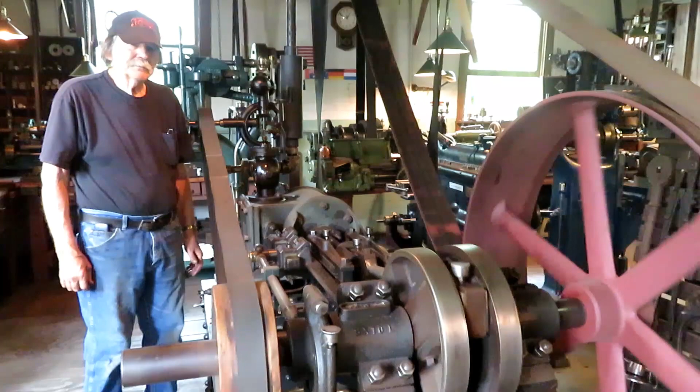It's a beautiful summer morning here in lovely North Valley, New York, and we're steamed up and ready to go on a job that has to do with an antique gas pump, about a 1920 vintage. It's pretty high-end restoration, and the customer brought a part of a gear that was broken in two and half of it was missing, so we're going to do that. We're going to make a gear for it, and I'll show you how that progresses. It's quite a long video today, so let's get started right away.

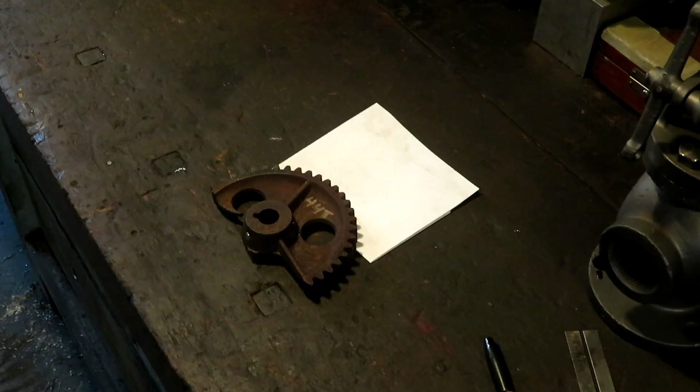Okay, the job is to make this gear. It's broken. It goes to this antique gas pump. Half the gear is missing, a little less than half the gear, actually. So by putting it on a piece of paper and tracing it and turning it around and around, I've determined that it actually was a 44 tooth gear. So we've got to spec this gear out.

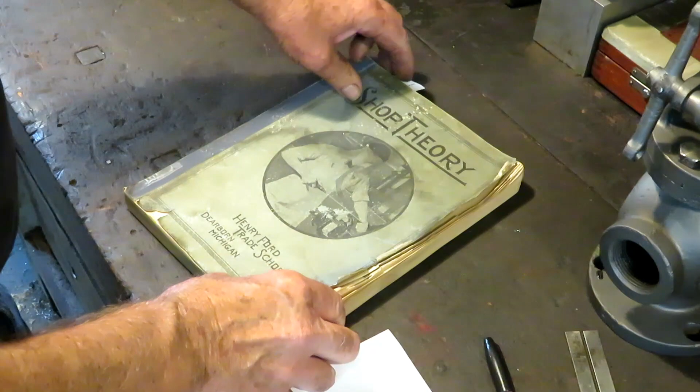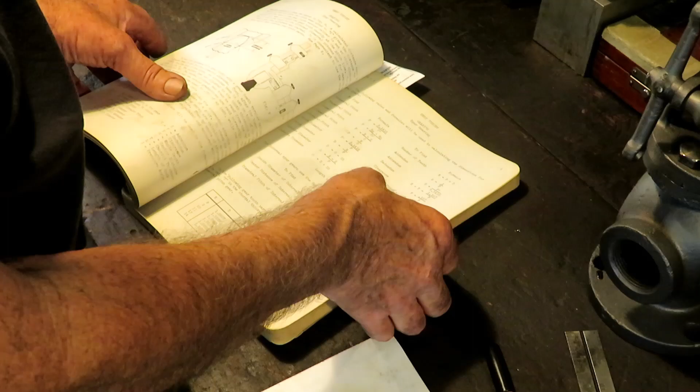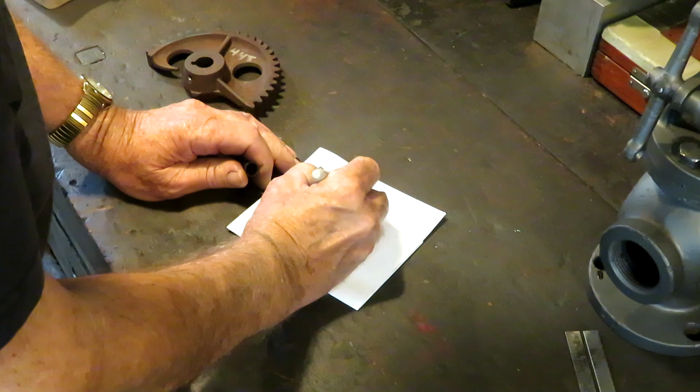As far as the diametrical pitch of the tooth is concerned, we can use the gear formulas. So I'm going to use the old Henry Ford shop manual, and in the standard gear formulas that they give, one way to find the diametrical pitch is with this formula. Pitch equals the number of teeth plus 2 divided by the outside diameter. So those are things that we can determine. So the diametrical pitch equals the number of teeth plus 2 divided by the diameter. And because there's a little more than half of the gear left here, it's kind of easy to measure right across the center of the hole, because it's an even number of teeth.

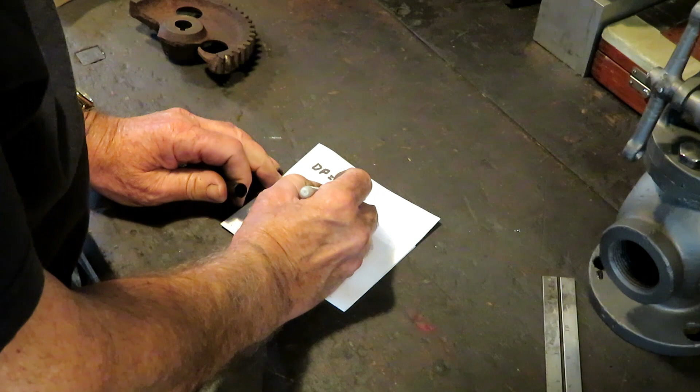The diameter is 5 3/4 inches. So that'd be 5.75 equals 8. So the diametrical pitch of this gear is 8.

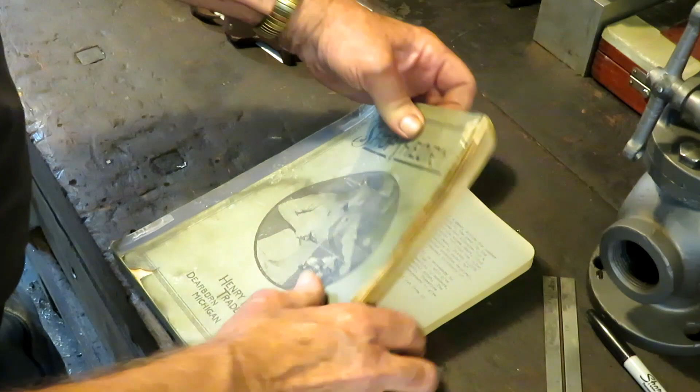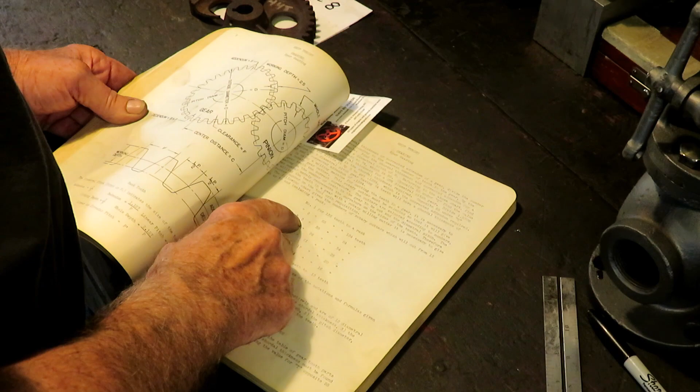So, in order to figure out what cutter we need, we go to this table, and this has the numbers of each one of the diametrical pitch 8 cutters to cut these number of teeth in this range. So to cut a 44 tooth, we're in here between 35 and 54. So that would be a number 3 cutter in an 8 diametrical pitch, and I just happen to have one of them.

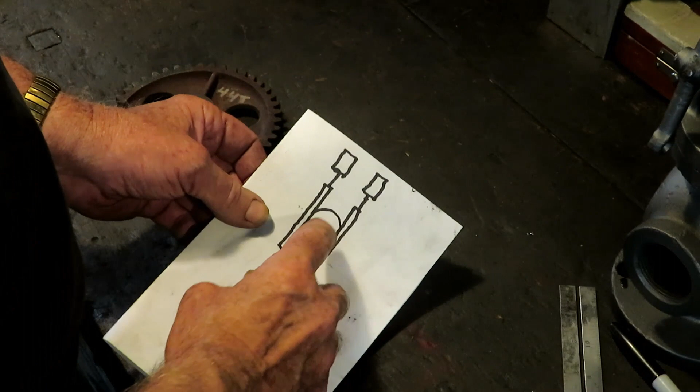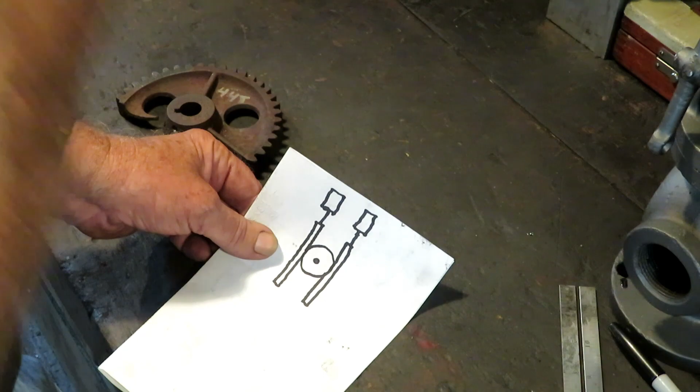The way this gear works in this gas pump is the gear is situated between 2 racks. So, and there's a shaft coming through the gear. It's got a long handle on it, about 4 feet long, so that when the operator pumps the handle back and forth, these racks go up and down. One goes up and the other goes down. And they're hooked to pumping cylinders in the top of the pump. They pump the gasoline up into a glass reservoir on top of the pump that's graduated in gallons. So you pump up however many gallons you want, and then it drains by gravity down through the hose into the nozzle into your gas tank.

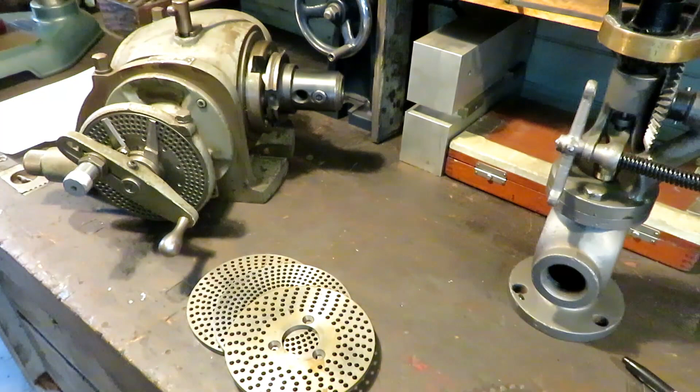The next part of the operation is to set the dividing head up to cut 44 teeth, which I've explained how I did on several other videos, but it's just a matter of using the formula, which really isn't a formula, it's just messing around with fractions. Since almost all dividing heads are 40-to-1 reduction, you just take 40 over the number of teeth that you want, which is 44, and you've got a fraction.

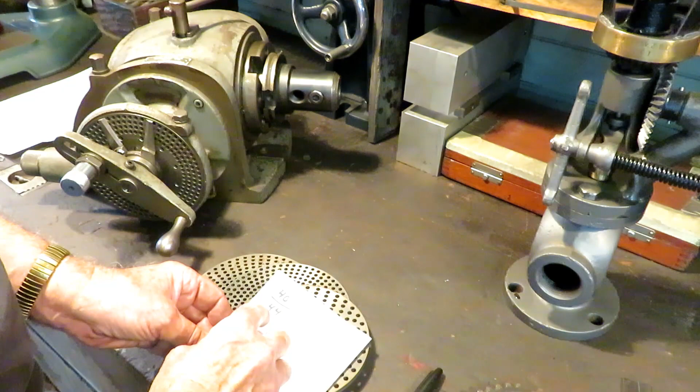So you either reduce this fraction by multiplying both the top and the bottom by some number, or dividing both top and bottom by some number, and you play around with it until you find the bottom number to be a plate that you have that number of holes for. So if I had a 44 tooth plate, it would be perfect, because I'd just use 40 holes on a 44 tooth plate. Well, I did this from before. I wrote down all the numbers of holes in the different plates. There's 4 plates in this set, and there is no 44. So I doubled it and made it 80 over 88, and there's no 88. What did I do with it? Oh, here it is.

Or you could divide it in half and make it 20 over 22. Well, there's no 22. There's only so many numbers that'll divide into 44 equally that you can divide both top and bottom by. So it drove me nuts. So I reduced it down to 10 teeth out of 11 by dividing this by 4. Becomes 10 teeth in an 11 tooth hole.

So I went ahead, this is a little out of numerical order for this video clip, but I made an 11 tooth hole, 11 hole circle, I should say, in the space that was left over on this one plate. Then I went back and I got to thinking, why would they not make a way to cut a 44 tooth gear? I mean, that's ridiculous.

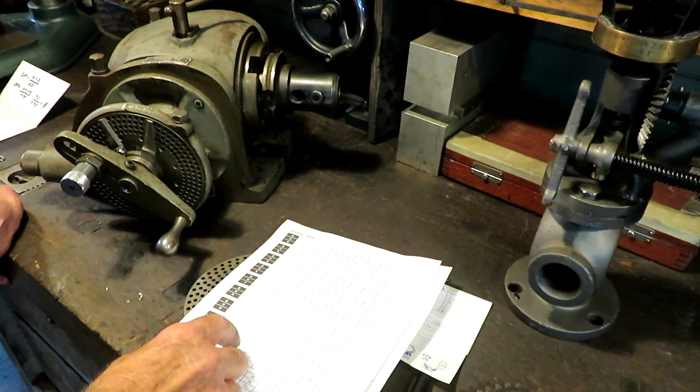So I said, there's got to be a chart somewhere that has all the numbers of teeth or numbers of holes for a 40-to-1 dividing head. And I looked online, and man, there just about isn't any. And finally I was on the Practical Machinist website, and somebody asked the same question, and they said, well, Grizzly makes a nice dividing head, and their operating manual for their dividing head, you can download it. It's a PDF file. So I did, and I came up with this very nice chart that's got all the possibilities.

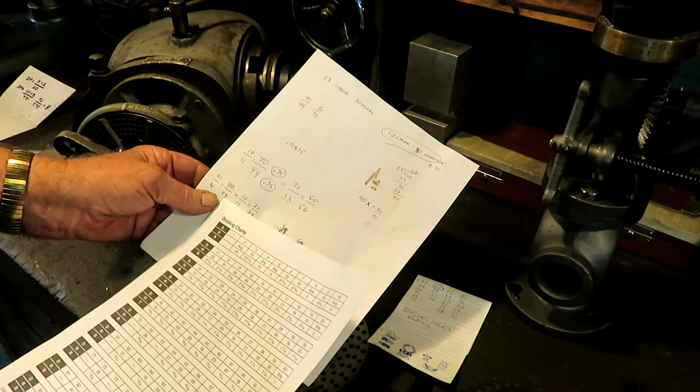I looked it up. A 44 tooth, 44 divisions would be 30 over 33, 30 holes on a 33 hole plate. Well, that 33 is not divisible by our original formula here, 44. But I finally figured it out.

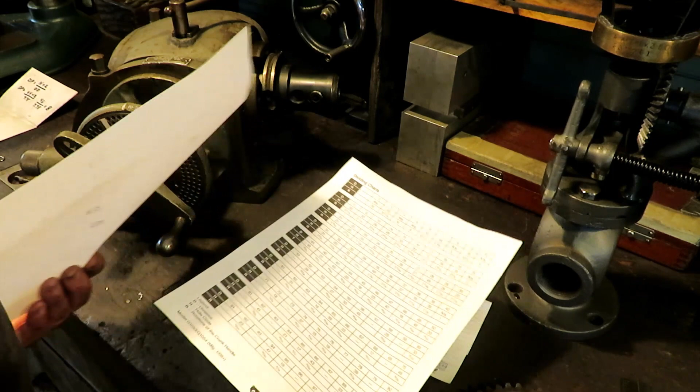I had a mental block in that I was thinking that you had to divide both of these numbers by a whole number, and you really don't. So if you take the 40 and multiply it by 0.75 and the 44 multiply it by 0.75, you get 30 over 33, or 60 over 66. You can run that fraction up and down. You don't need to bother with this if you have this chart, but I didn't have the chart to begin with. So anyway, any of these would have done: a 66, a 33, a 44, or 11, which I made.

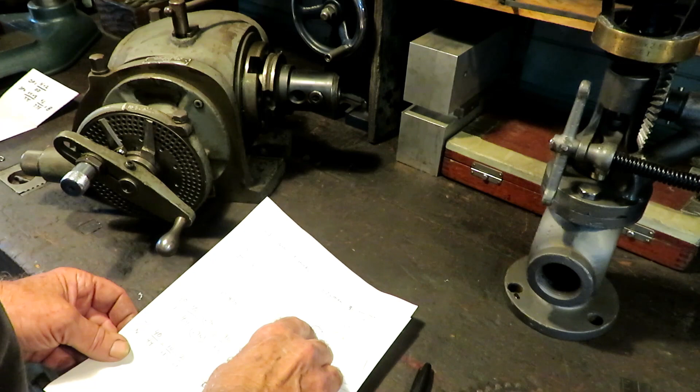And it just so happens that I had a 66, and I could have done it with 60 holes on a 66 hole plate. So anyway, that's the deal with that. I've already got the 11 hole plate drilled, so I'm going to use that.

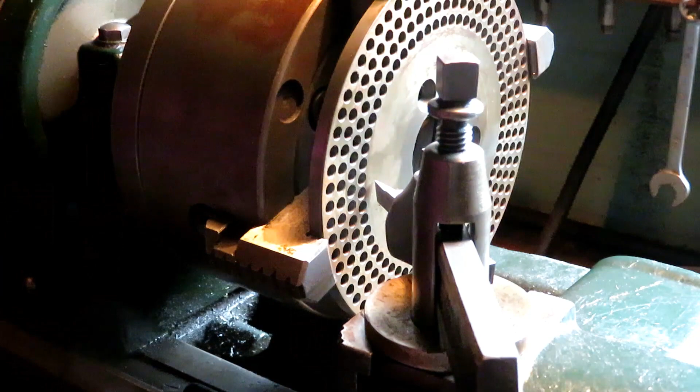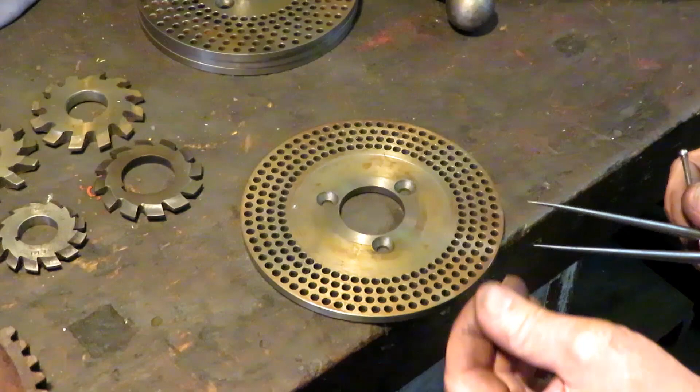Take the best dividers you have and you punch a mark on your scribe line here to start with, and then you go around the circle and you keep adjusting this until you get it to drop right back in the first punch mark. So you get 11 marks around the circle.

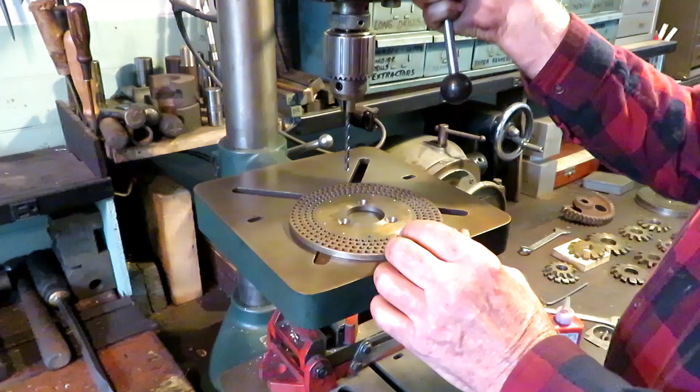The drill size is number 13, 185 thousandths. Stuff drills like it's cast iron, might be. Drills very easy.

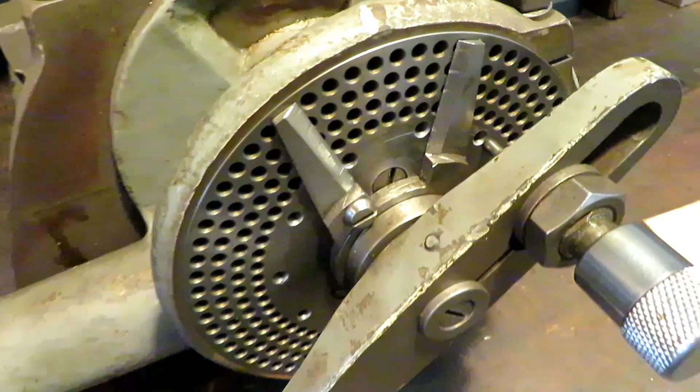Here's what it looks like set up on the dividing head with the sector guide here set to span one hole. So we're going to go 10 holes on the 11 hole circle. So if you were in this hole to start with, when the movement came, you'd go around not quite one turn, 10 holes out of the 11. So the dividing head is ready to go.

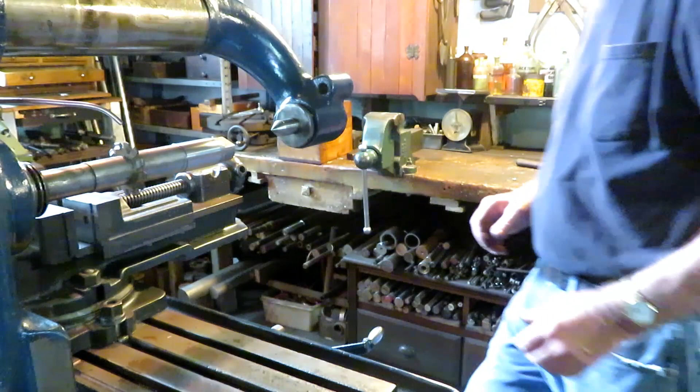Before I got too carried away into this project, I wanted to do an upgrade on this old 1895 Brown and Sharpe milling machine that I've been putting off for a long time, and I decided to just go ahead and do it. The support arm here, for as long as I've had this machine, has just been a center. It goes in the center hole of the arbor. I'll show you. Like that. And you just lubricate it, sort of like a lathe center. Well, it's not very rigid.

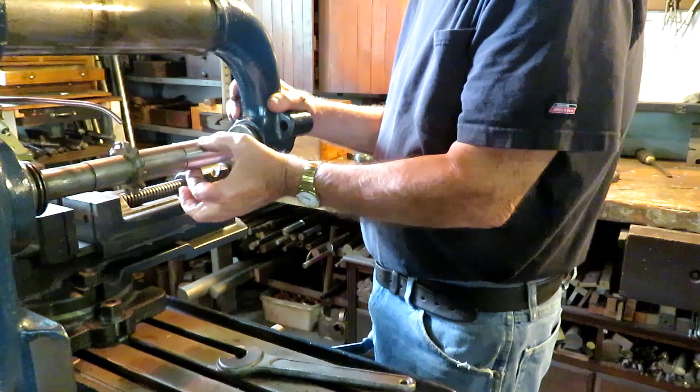And the way most more modern milling machines are, they have what they call a running bushing here, which is the last spacer before the nut, and it's hardened and ground, and it's a very good finish on it, and it runs in a brass bushing in the overarm. So I made one.

This is it. It's a piece of 1045 steel bored out with a bronze bushing pressed in and honed to size, so that it's as perfect a fit as I can get on this running bushing. And it fits in here the same as the other, with a pin to stop it from turning. There must have been one for this at one time, but it's long gone. And that fits in a little slot here, drops back in.

Now I got a screw on this side that pulls it up and holds it tight. But that will run right in there like that. And it will make the arbor much more rigid, so I can take heavier cuts, and it'll give us a smoother finish, and I'm kind of anxious to see how it does work.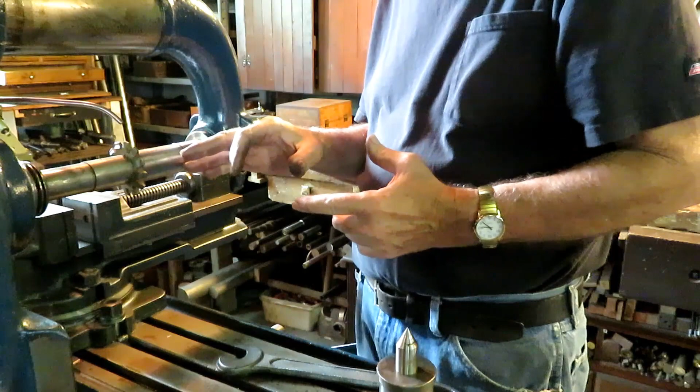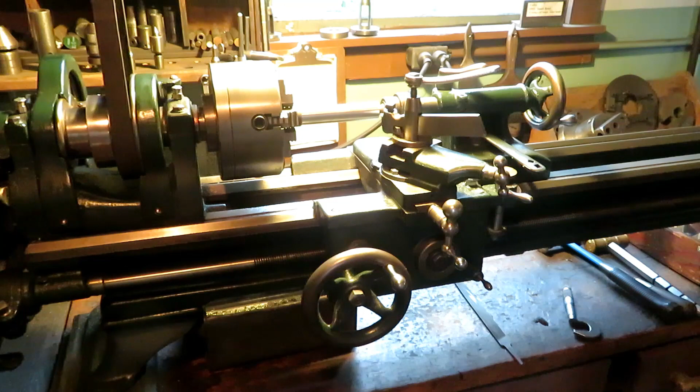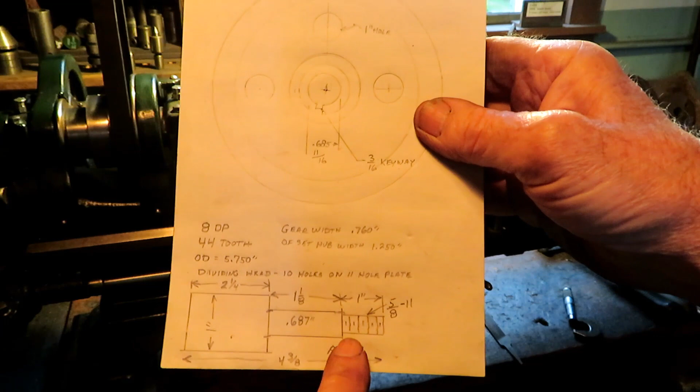I'm making an arbor to mount the gear and the dividing head on the 1925 South Bend Junior lathe, and I've got the 1 inch diameter that goes in the dividing head already cut. This is what it looks like. I've got two diameters here and one threaded portion. This is .687 or 11/16.

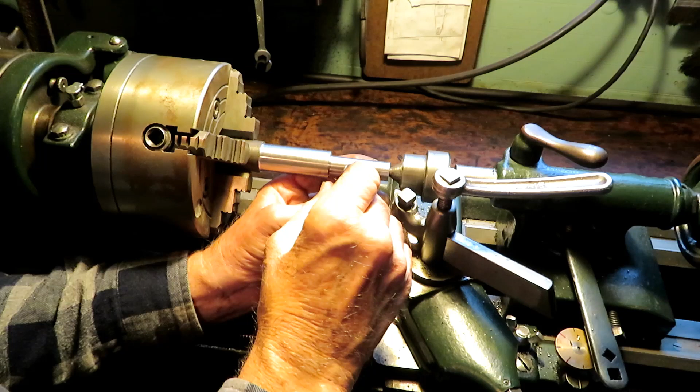I got the 60-degree threading tool in here, and it's right on center, and it's lined up straight with the surface of the work. So that's ready to go. Now I've set the lathe up to cut 5/8-11 thread. And I've showed how to do that with the gearing and the formulas in past videos. So we're just going to use the chart here. 11 takes a 32 on the stud and 44 on the screw. So I'll switch the gears over and then show you what they look like.

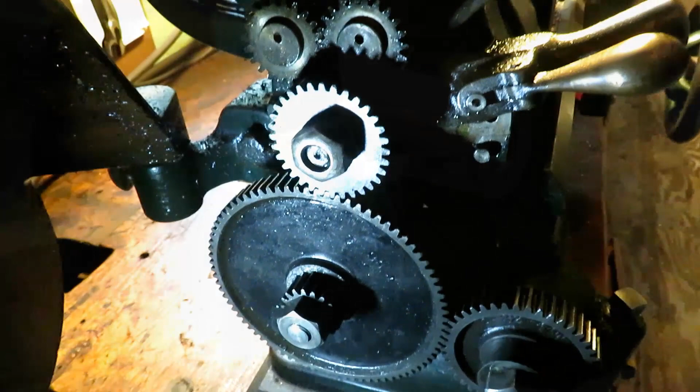Okay, there it is. The 32 is on there, that's the stud, and the 44 is on the screw, on the lead screw, and this big gear is just connecting the two together. It really doesn't matter what size gear you put here. It's just an intermediate gear. It doesn't do anything as far as changing the ratios are concerned. And then you got to set the tumbler up here so that it's feeding toward the headstock.

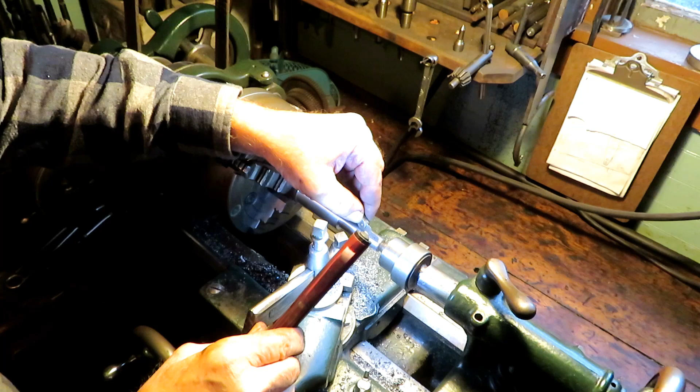Okay, got an 11 pitch thread, which is an odd pitch, so you have to go either on the numbers or the line, either on the red or the blue here. So I'm going to go on the red just because I'll remember it. Okay, so we'll shut it down and check and see if we got an 11 pitch here. Oh, my gauge is over in the other toolbox. Okay, I don't know if you can see that very well. That's right on the money for 11. So we're good to go.

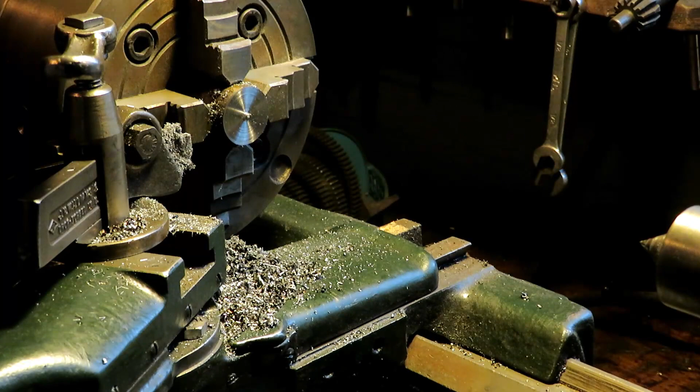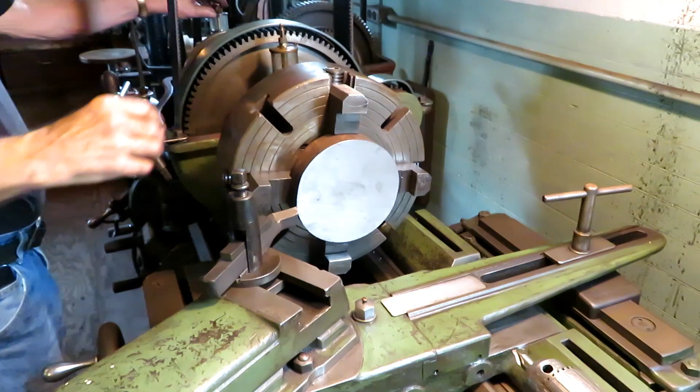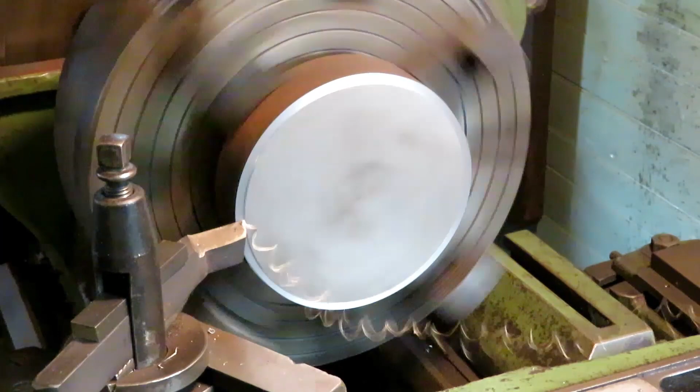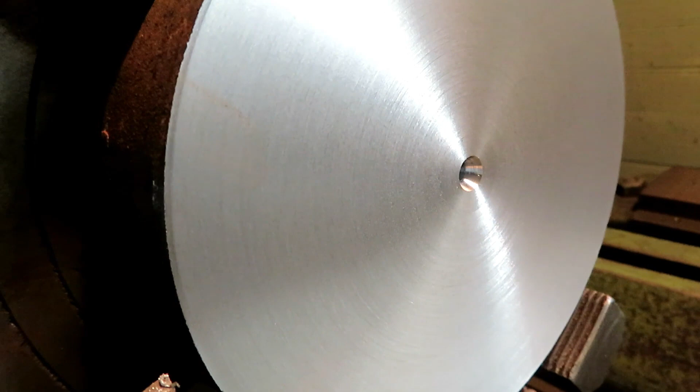Wow, I lucked out on that one. I thought I might have gone too far. That's about right. I was pretty surprised at how well that 150-year-old lathe tool worked. I got a pretty good edge on it.

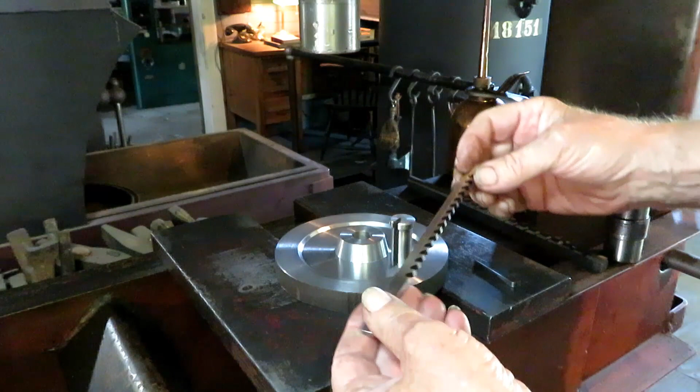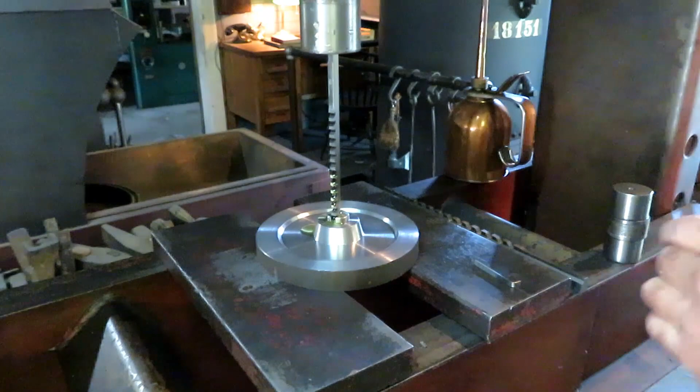3/16 keyway broach, Series B. No matter what width the key is, it's 3/16 wide. Takes a 3/16 slot. You can also get a 3/16 in a C series, which is 3/8, but you can't get a bushing in there. It'll take that size slot very easily. This requires 2 passes, and you get the proper shim with the broach.

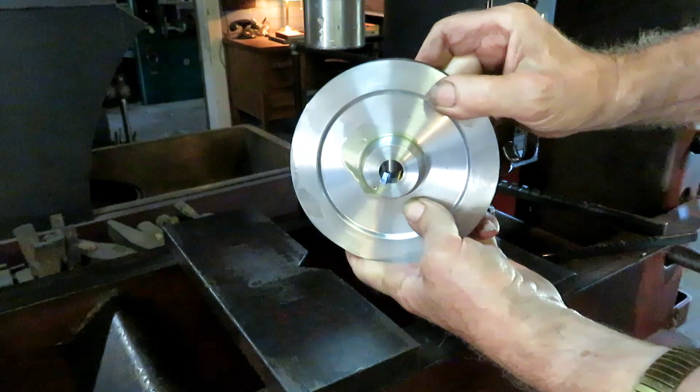I'm going to put this blank on the arbor so I can turn the OD of it concentric with the hole, in the lathe.

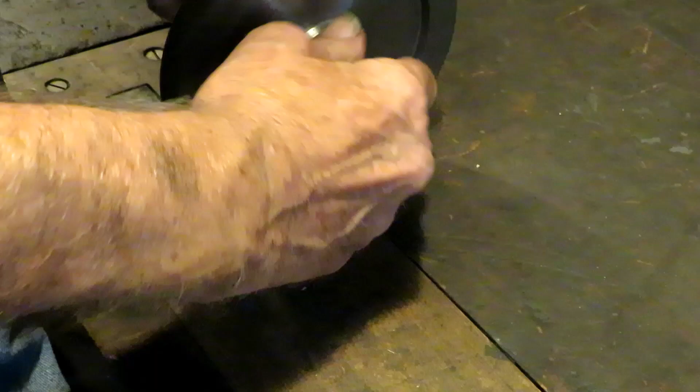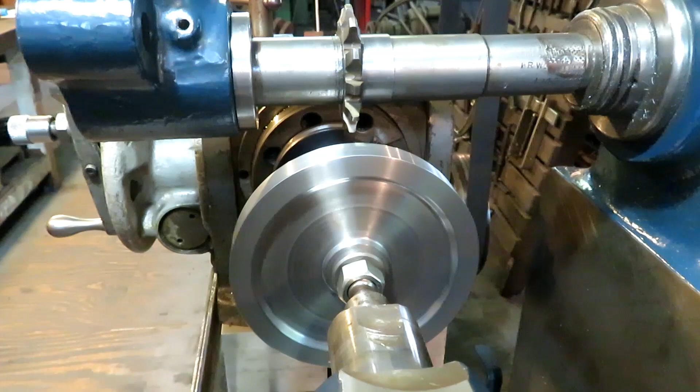Gear blank is set up and ready to cut, and I had intended to finish this up today, but it's 88 degrees outside and the heat index is over 90, and it's just too hot to fire the boiler. So rather than hold this video up for another week, I'm going to do it in 2 parts, and we'll see you next time, and we'll cut this gear.